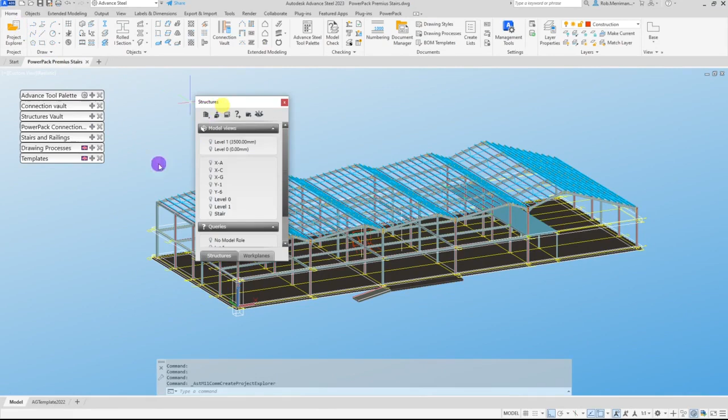Okay, so let's actually get into this. I have the summer school model from Alec, and if I go to our Project Explorer, I've added in here a model view for the stair because there's quite a lot going on. If I click the model view, bang, there we go. We're just working in our stair area.

Now I'm going to repeat what I talked about in the presentation, and I'll keep banging on about it every time I show the stairs, but you need to have this setting out information in here before we get going.

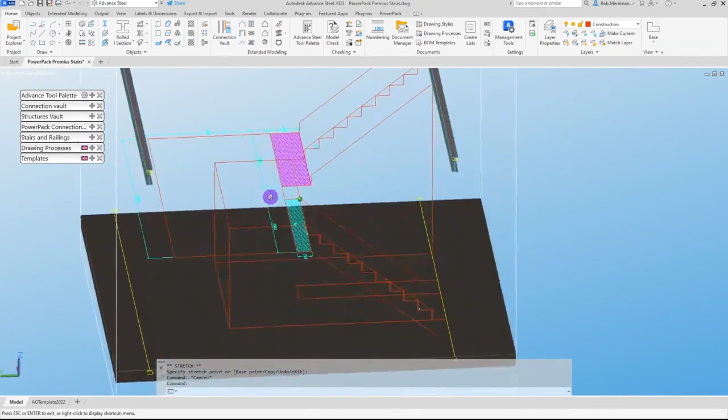We might have gone a little bit overkill here for today's presentation, but we have our rises and our goings drawn in. We've done it on the center line, and we've done the inner and outer just so we can see where everything is. We have our landing extensions here that I've dimensioned up so we can see it.

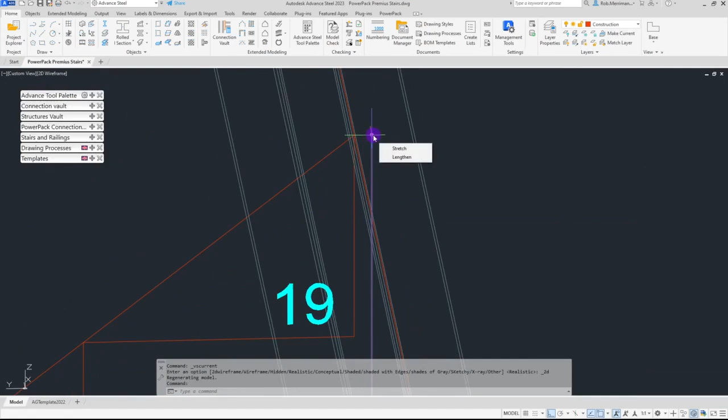We want a 15mm overlap on this stair, so if I come in here, you can see that my last point is where the tread finishes. This is where my landing extension point is, and in fact that staircase is going to actually hit the beam.

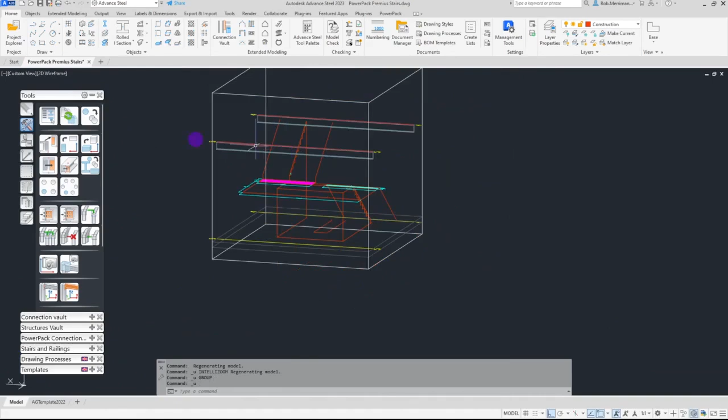So we'll just quickly move it back so we'll get everything in there, and we'll move it in the Y direction. We'll pull it back 500mm for today's example. Maybe a bit far. So we'll move it again.

Go to select objects. Just a tip, if you've selected something previously, rather than drawing a window again, I can type PREV for previous, and that will pick that up. We'll just move it to 50 this time.

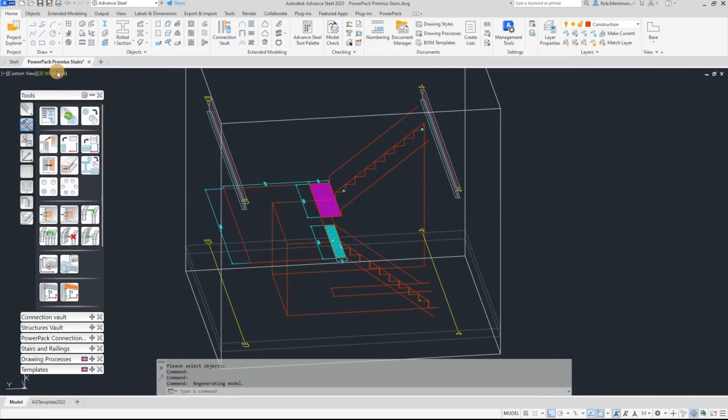But I have all of that information there. I've worked out my landing extensions. I know how many treads I've got in each flight. I've got my extension, I've got everything worked out. That's what we need to have in to make sure that we are successful with these macros.

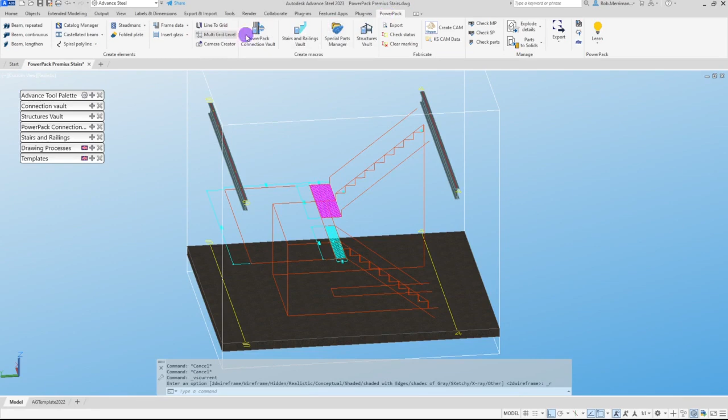Now, the PowerPack stairs and railings tools are accessed from a palette. So if we go to the PowerPack tab, in the 2022 and 2023 versions, they're accessed from a palette. Older versions, they were just functions on the ribbon, but we've put them in a palette. You can see here we have the stairs and railings vault, which I have in my stack of palettes already.

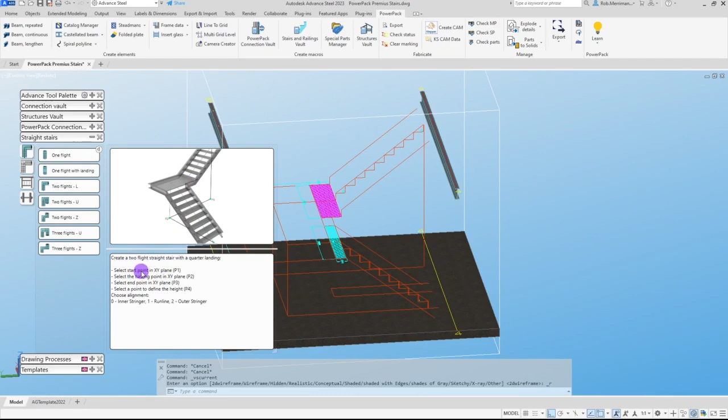And then within our stairs here, you've got the little fly-out to the right, especially if you're new to any of these tools in the PowerPack, just any tools in the Advance Steel palette, you will have a little preview. You'll notice those pictures are the ones I've conveniently put in my presentation. And then you have a description of what the macro will do and what our selection points are.

So we are going to do 2 flights in a U-shape. So we start the macro. The system then asks me for my first point in the XY plane, so that's my start point here. Then it wants the first turning point, so that's this point here.

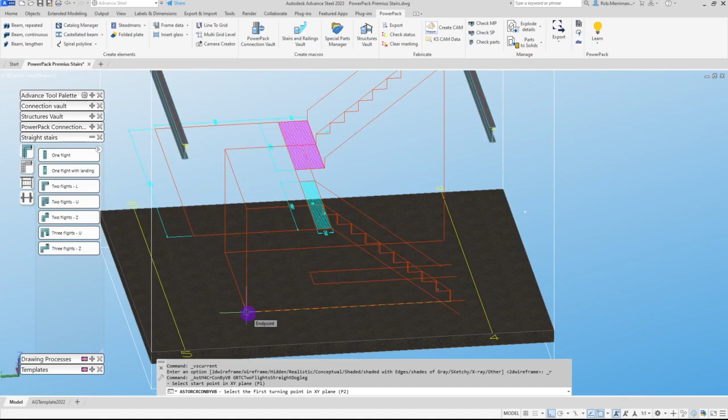And again, we've drawn these points out so I can easily pick them. Second point here, third point - I'm going to go in just to show where I physically want the tread to stop, but because I've got my overlap, I need to come to this point here, and then I need to come up to define the height, which is this point here, and then is my stair to the right, center, or to the left. So because my setting out points are on the center, I'm choosing center, so I'm doing 1 and enter.

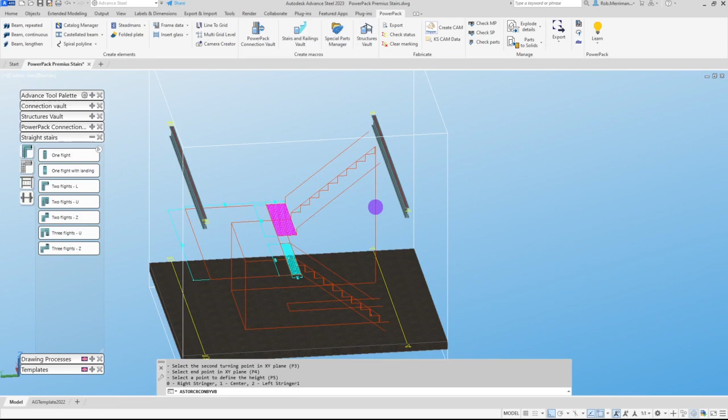And then we'll just let the macro build the stair. Now it's doing the 2 flights with the landing, so it is going to take a few seconds. We just want to be patient here. If we get crashes with Advance Steel, it will crash.

Word, PowerPoint, Excel, Outlook will crash from time to time. And I've noticed that I've been silly there because I'm on the construction layer because I was putting my construction in. As everyone knows, we should be on the standard layer and the system will take care of everything for us.

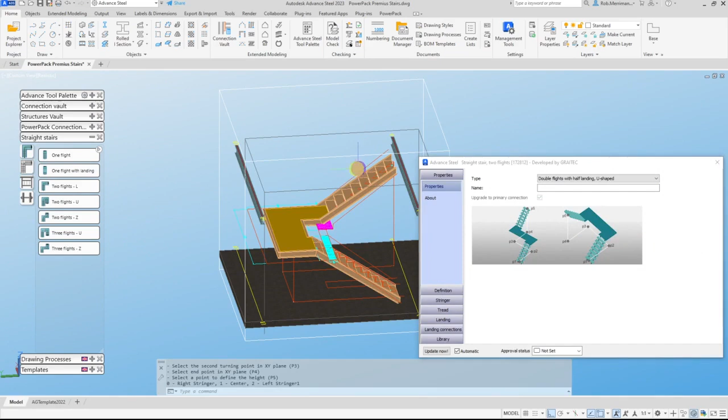So we'll just click those points again, and we'll just put that in again. So we were saying a minute ago, the system will crash, but sometimes we can make it crash more than we're expecting to. The system was building the staircase. If I start clicking things because it's not happening quick enough, that potentially could cause it to crash. So there is my staircase.

Now that's not correct to begin with. It's not got the right number of treads in. Now the order that we set this up is important. What we need to do is go to the landing. I know my landing width here is 2 meters, so I'm going to set that to 2 meters.

Then I want to come in and set my treads. I know in this one we want a going plus overlap, so I want to set the macro to use going plus overlap.

And then for my tread type, I know I want folded treads, so folded plates. I'm going to set that to folded plates. And then in my dimensions, I'm going to set the overlap in here. This is why, third time I've banged on about it today, I need to know this information before I start. So my overlap is 15 millimeters.

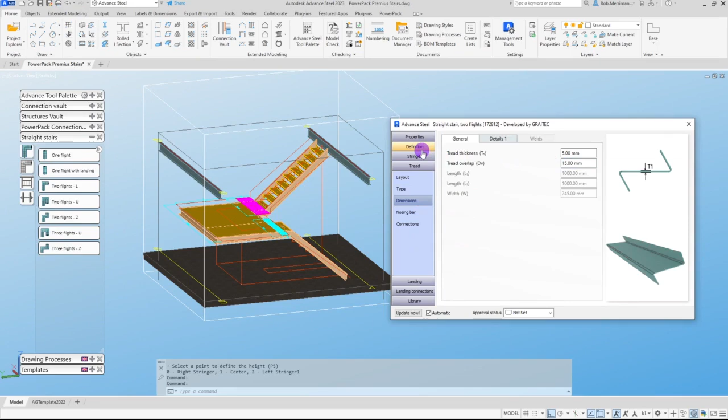So we go landing, then choose our tread layout, so going plus overlap, choose our tread type. If we have an overlap, set that at this point. And then we can come into the definition of our staircase in here. So you need to go in the order that we talked about here. The width of the flight is 2 meters.

And my landing extension for flight number 1, so this dialog, the geometry, because we've got 2 flights in our staircase, for flight number 1, my minimal landing extension, the landing extension that I want, is 250 millimeters. So I set that in there.

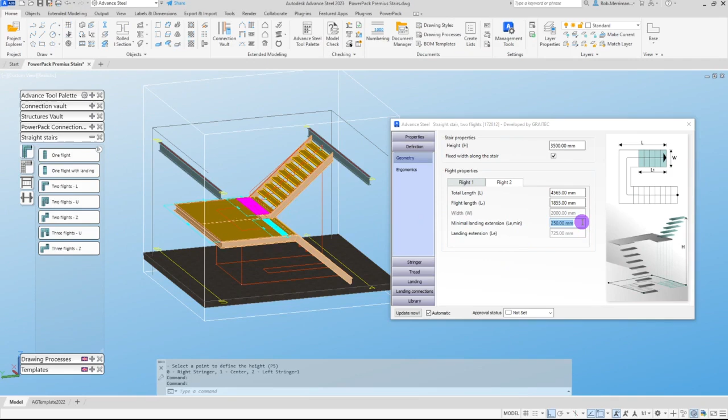Then for flight number 2, my minimal landing extension here, let's just check I've got that right, is 480 millimeters. So I'm setting that. Now, it's still not quite right, but this is the order that we have to go through to set the macro up.

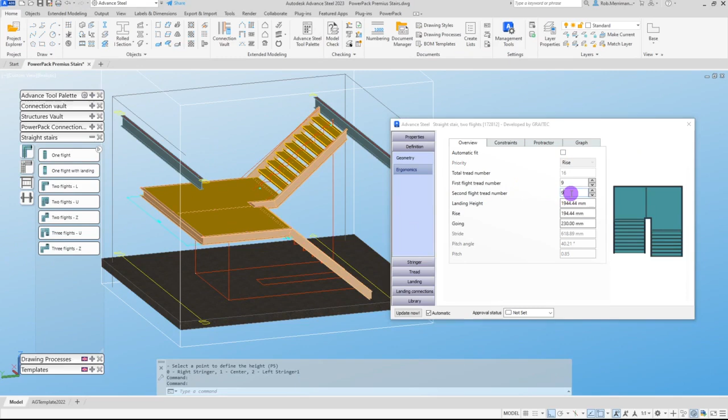And then I can go into the ergonomics tab, and it's not using the number of steps that I require. So I'm going to untick the automatic fit. And because I've set this out before and I know my geometry, I know that I want 9 treads in each flight. And here we can see that the macro is now following all of my setting out points and my geometry points.

Now the last thing I'm going to change is the angles of my treads in here. So I'm going to go back to the tread type. I'm then going to go into the sub-tab called Dimensions. And in detail number 1, I'm going to set the nose here to 50 millimeters.

And I want it at minus 90 degrees. I want my length here to be 160. And I want my angle to be 90 degrees.

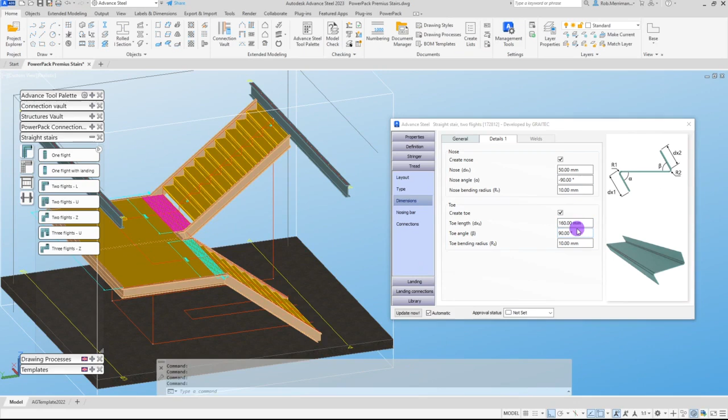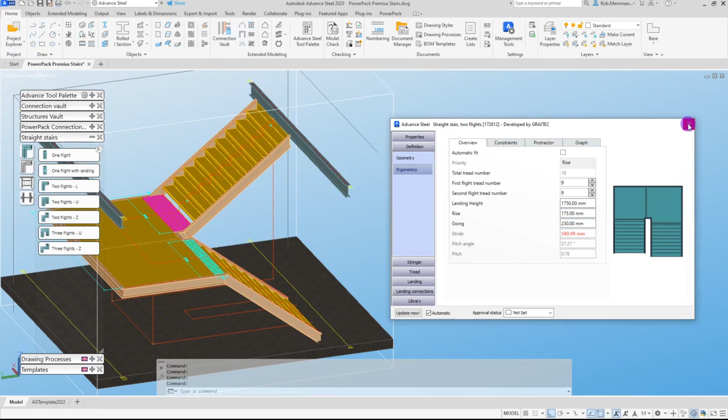At this point, I can then go back to my definition. I can look at the ergonomics. Now, I knew before I started this, because I'd done my setting out, I knew what my rise and going was. I do have a rise of 175 millimeters, and I have a going of 230 millimeters.

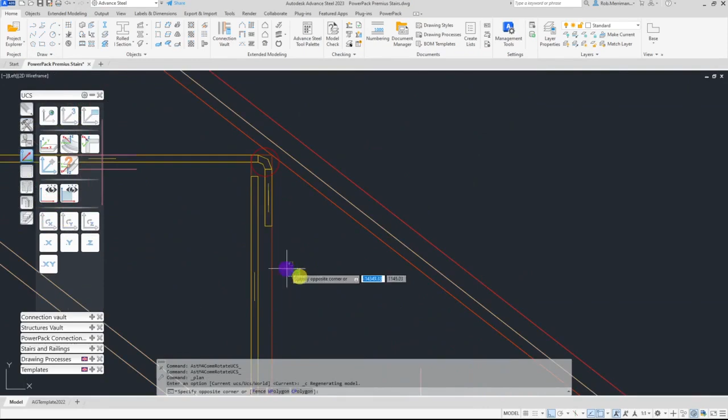So what I'm going to do at this point is I'm actually going to come out of the dialog. I'm going to go to a 2D wireframe, and I'm just going to check my geometry. Because I've put the work in and I've done the setting out points, I can then check all of my geometry. So you can see here, this is the 2D setting out that I drew. There is my rise and my going.

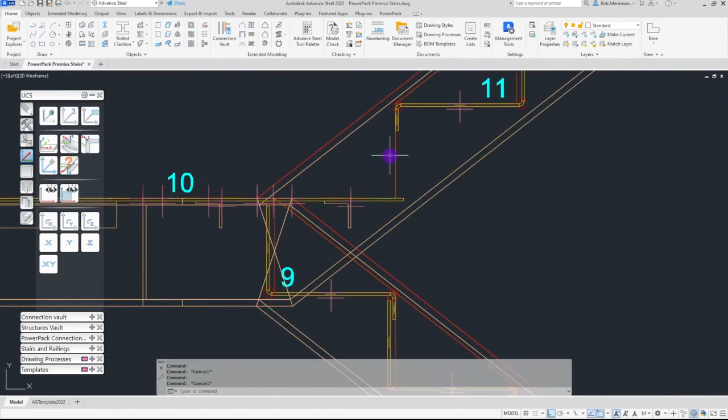Here's my overlap. We can see that at the bottom my height is correct. We can see in here that this is where my landing starts and stops. This is where my first tread starts. I've still got the 15mm overlap in here.

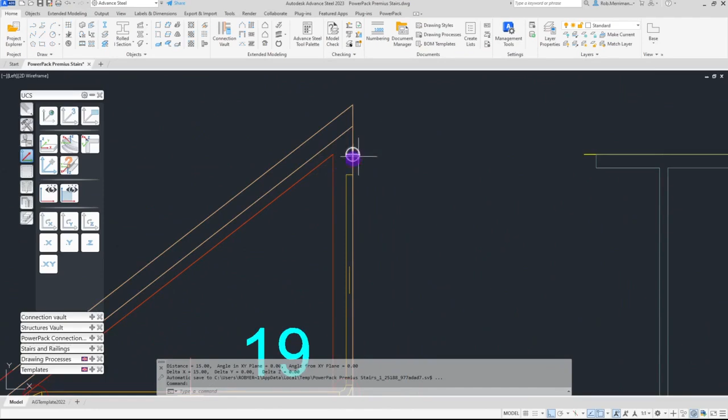And then when we come to the top, if I do a distance, if I go from this point here to this point here, in the X direction, that's 15mm. I haven't turned my top landing on yet, but when I do turn my top landing on, I can put my drop down in there so that my landing is set to the correct point.

But that is, and we can see in here as well, these are the geometry points for my stringers. My landing is 2 meters wide, so I've got my AutoCAD line in here. There's the AutoCAD line, that's where I wanted my stringer to be positioned. That is following all of my geometry.

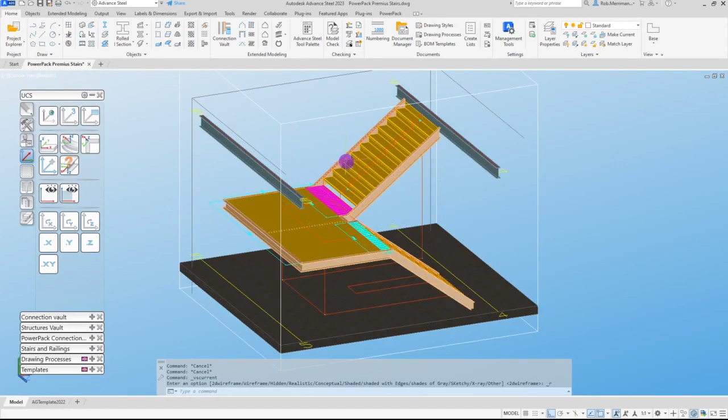That's why we take the time, we put the work in to get that 2D geometry. Even if it takes you half an hour, it is so worth getting all of that information, because then we can extract all of that data from my 2D setting out points, and then the staircase is going to follow exactly what I want it to do.

Now, we have got some work to get this staircase to the point that we want it to get to, but without that starting information and that setting out information, it's pointless trying to use the stair macros. We need all of that information to get to this point. I'm going to hit save at this point so we don't lose anything, and then we can actually go back in to start changing this staircase to how we want it set out.

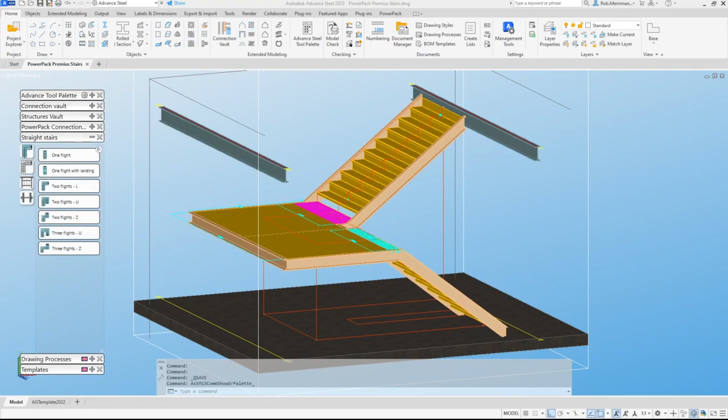Okay, so now we have the basics sorted. Let's go back into the macro and see what we can do for our staircases with the PowerPack Premium Stair Tool. So now you can either double click the joint box.

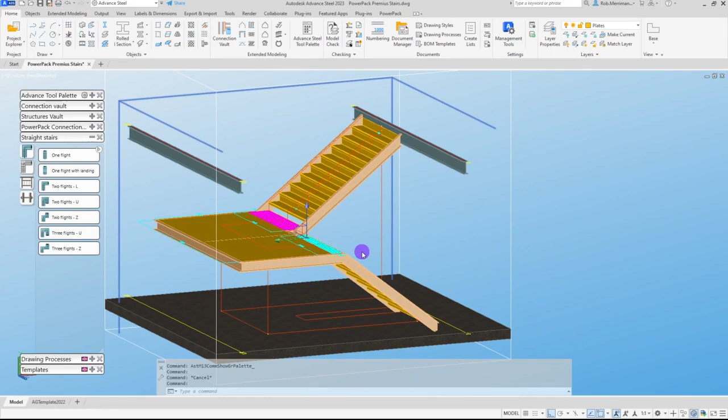Just an advanced tip for any joint: if you click on an element of the joint, you can right click and go to joint properties. Some people like to have the joint boxes off, they like to have the layer off, because on a big model they do start to get in the way. But you can come in here and that brings the dialog up.

So we've done all of our setting out. We're now going to spend the rest of this webinar looking at what we can do within the macro itself. So let's go to the stringer.

Now, as I talked about in the presentation a little bit earlier, one of the key features with these PowerPack Premium Stair Tools is we have the option to use plate stringers. So we can do our sections from beam profiles, or we can choose plate stringers.

One thing to note, because I've had a couple of support cases recently on this, is currently at the time of recording, which is August 2022, we can't do square or rectangular hollow section stringers from the standard sections in the macro. This has been raised - there is an ongoing case with our development team to look at changing this, so hopefully in the next release we will get a change on that, because we are aware of it.

So before I change it to plate though, what we need to look at here is we've got an option for outer and inner, and at the top here, so I'm on the outer stringer, I've got a tick box here that says enable stringer. So if you didn't want an outer stringer for whatever reason, or an inner one, say it was floating, you do have the option to have different stringers.

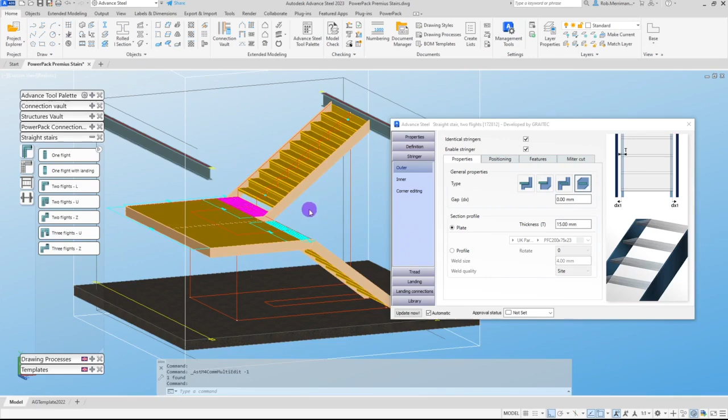So now that I have identical stringers ticked, I am going to say I want our stringers to be from a plate, and I'll leave it at 15 millimeters thick. So we can see now that's all changed to 15 millimeters.

We can then go to the positioning tab. Now, this was a new feature for the 2023 release. You used to have to set the top distance, so from the nosing line to the top of the stringer, and then from the rear of the tread to the stringer, and that would give you your total plate width. So if you wanted, say, a 200 deep stringer, you'd have to just start working out what you needed.

We now have the option to say, okay, align based on just the top, please. That is now set to 20 millimeters, and you can see the pictures change. We don't have that distance from the rear of the tread to the stringer. So what we have now is a total plate width.

So in here, I can say, I would like you to be 220 millimeters, please. So that is a total width of 220 millimeters. The same on our landings.

Let's say we do want it 20 millimeters above. I can say, right, I want to set my align on top, and we can say that we want that to be 20 millimeters. And because at the moment our total plate width on the stair is set to 220, the system is defaulting - you can see in here, system is defaulting that on our landings that's also 220 millimeters.

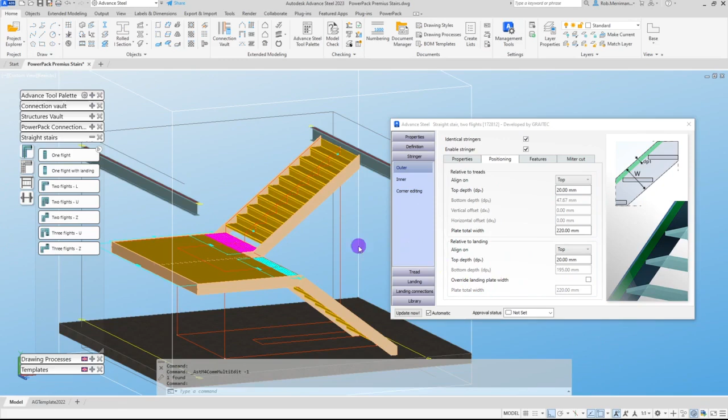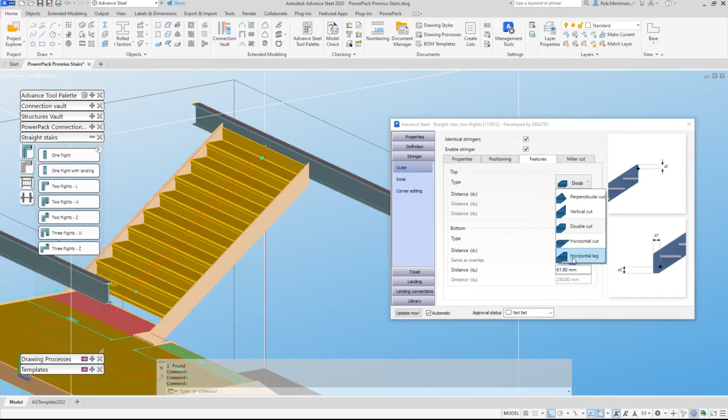Then we'll look at the features. Now this applies to the top and the bottom of the staircase. Now the top, I'm going to leave the top for now because I'm actually going to put a little landing on the top here. So I don't need to change anything on the top. I could put a horizontal leg in, but because I'm doing a landing, the system is going to put the horizontal leg in for me.

At the bottom, we've at the moment got a double cut, but I actually want to say, no, I want a horizontal leg in there. And again, because I've got identical stringers ticked, you can see that it's doing it for the outer and the inner. And then it's just a case of setting our values in here. So distance D1 is from our nosing position, so I want that to be a consistent 20 millimeters.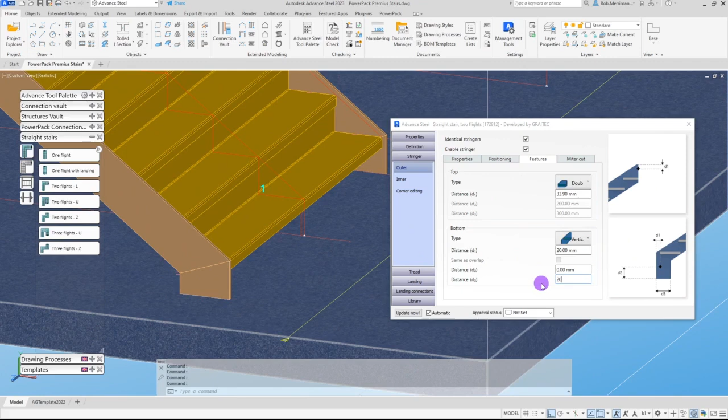The distance D2, that is from our setting out point there. So I'm going to set that to 0 because I don't want it going through the floor at the moment. We'll just put some angle cleats on outside of the macro. And then because I've got 20 millimeters everywhere, I want this to be 20, not 200.

And then the final option within our stringers is the miter cut. So again, everything is set to identical. Now within the PowerPack stairs and railings tools, we have what we call our tree structure. So if I expand my tree structure here, I've got my flight 1 and flight 2. So obviously flight 1 is here, flight 2 is there.

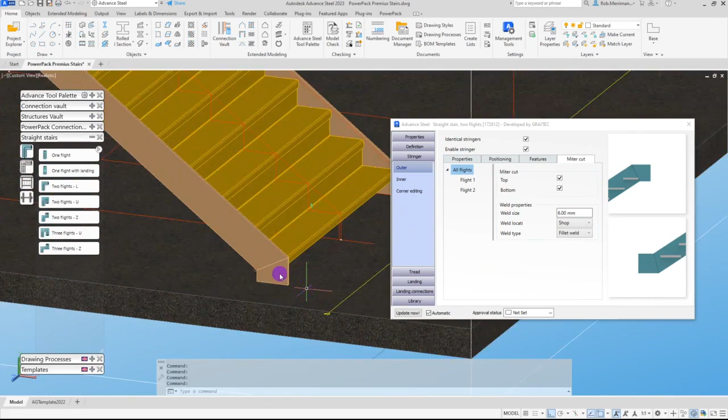So if I click on one of the flights, I'm just setting the information for just that flight. If I click on all flights, I'm obviously setting it for all flights. And with our stringers here, because they're plate stringers, we have the option within the macro to control where the miters are being put on. So these are plate stringers, these are Advance Steel plates.

If I'm getting them profiled, do I want to be welding in here, or are we going to get it all laser cut? So let's say we're getting it laser cut. Where I've got miter cut, I want to untick the bottom, and that will merge those two plates together. So you can see now that is one stringer, and because I'm set on all flights, it's done it for the bottom of this one as well.

Depending on obviously how long that is, we might need to weld that in there. For now, I'll just make them all merged. They're probably going to be too big. It's a pretty big staircase, this.

Now, I'm sure some of you are typing at the moment: can I split the stringers? It is a feature request that we've already added to the stair tools to improve for future releases. I don't know when that will happen, but it is something that we have already discussed and scoped out, so hopefully in the future we will have the option to split these stringers where we need them and where we can control them. So at the moment we can just control the miter cuts in there.

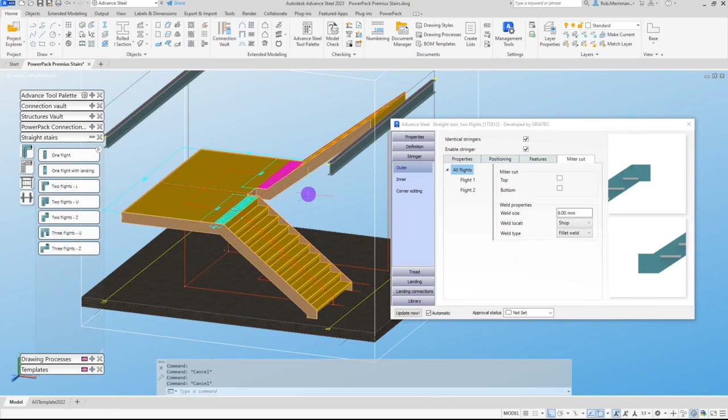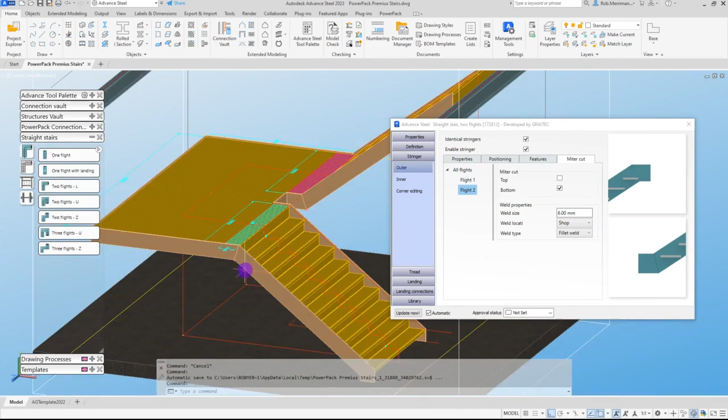But if we came in and we said, yeah, they're actually too big, we are going to weld them, I can come back to flight 1 and I can say, okay, on flight 1 I do want my miter split point in here. But then for flight 2, I need that at the bottom, so I can come in here and tick it on the bottom. That then gives me my split points. The inner one, because I said identical stringers, that is the same.

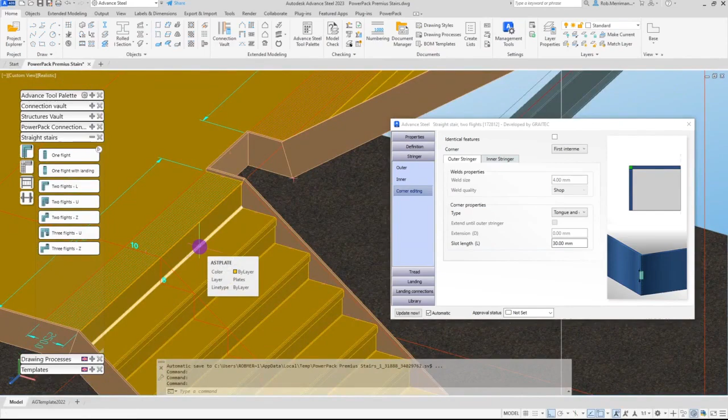And then we've got corner editing. Now, corner editing is obviously what happens in the corner. So we've got outer corners, and if we look at the underside in here, we've got our inner corner. Now, at the moment, my system, I'm not using any library entries, I'm just using literally what you get out of the box. So my out of the box default setting is using this tongue and groove option. Again, I have the identical features, so I'm going to say, yeah, these are identical features.

And then I've got my corners on my outer stringer and my corners on my inner stringer. So my outer stringer, we're going to put a connection on outside of the macro. Anyone that's done training with us, Graitec in the UK, we will say none of the macros will ever do 100%, especially stairs and railings, of what you want. Hopefully you'll see from today's and Thursday's sessions that the PowerPack stairs and railings tool will get you closer to 100%, but I'm still not going to stand here and say it'll do 100% of everything. So our connection between these two stringers, I need to put on outside of the macro.

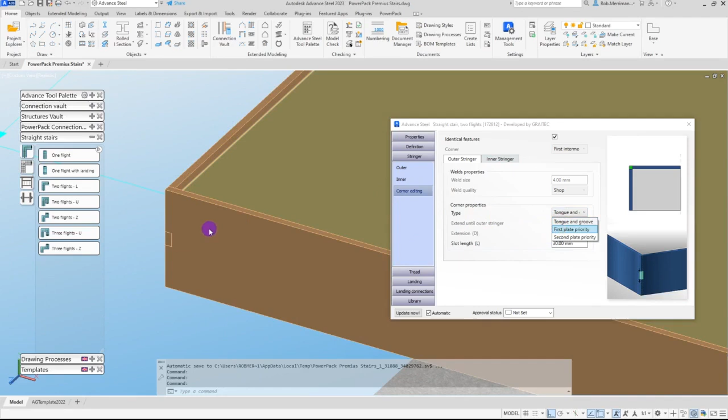What I'm going to do here is change this. Instead of tongue and groove, I'm going to make the first plate the priority. So the first plate is the stringer, the outer stringer here, which takes priority over this landing stringer.

On the inside, for my inner stringer, I'm going to do the same thing, saying the first plate takes priority. When you do that with the inner stringers, we've got this option here: extend until outer stringer.

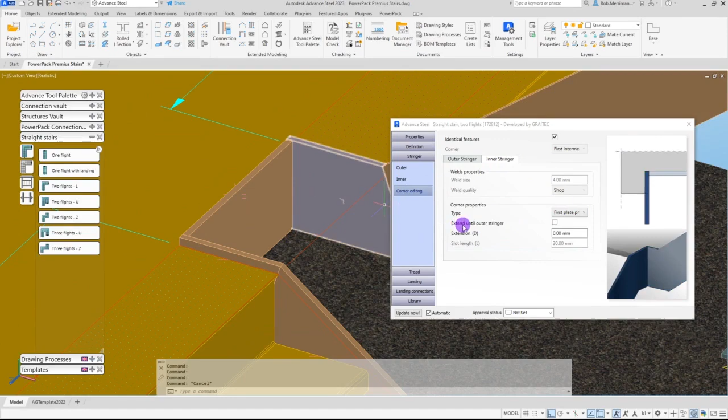Let's have a look at the underside. At the moment, the stringers are just doing that, but I want these two inner stringers here to extend all the way through to the back so that we've got some things to support off.

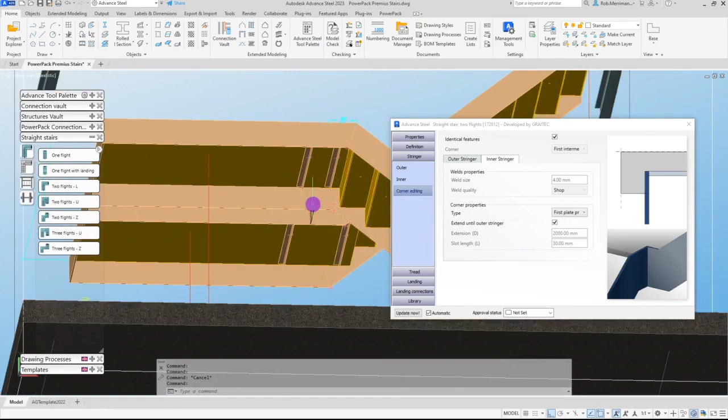So this is my extend until outer stringer. And there we go, they have now extended through. And because we've got the 2000mm extension above the floor, the system notches automatically around our floor thickness, so we've got our little notch in there.

So that is some of the options that we can do with our stringers. A bit pressed for time, so I'm going to crack on.

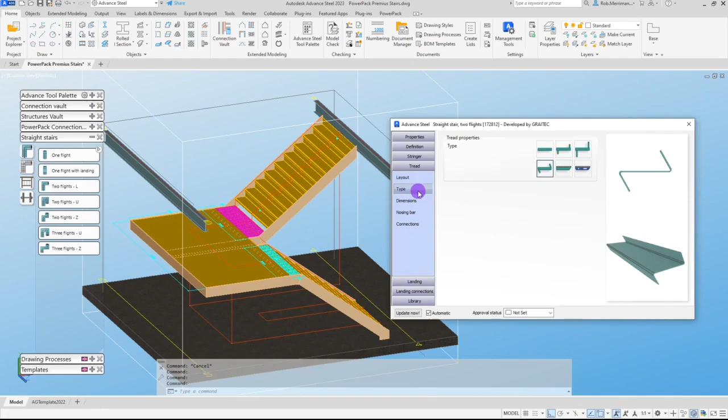We've already looked at the treads and set the dimensions of the treads. I'm not going to put any nosing bars on here, but if you want a nosing bar, we've got the option to do it from a profile, a section that already exists in Advance Steel, or create our own folded profile.

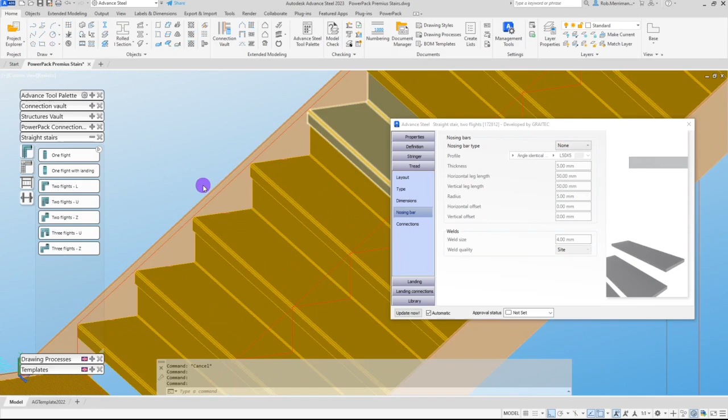You can see we've got our horizontal leg, vertical leg, and how it's connected to the tread. We can do that. Now that won't affect your setting out point. If I just quickly put one on to show you, the setting out point remains unchanged - it's then adding that nosing to our setting out points.

So we'll just turn that off for this example.

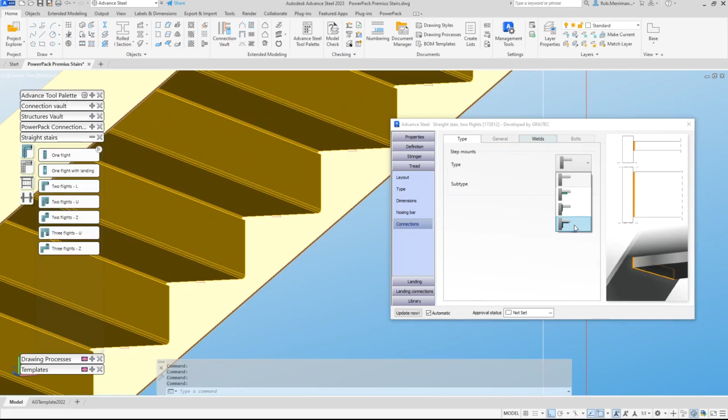Tread connections: if I come to the underside, ours is a little bit different with the PowerPack macro. You choose your connection type - is it a horizontal plate, a vertical plate, or an angle? For today, because we want to be consistent across the treads and the landings, I'm going to choose angle. That will then add the angle in there.

Then once we've chosen the angle, we choose in the dialog how that angle is connected to the tread and to the stringer. Is it welded to both, welded to the stringer and bolted to the tread, the other way around, or bolted to both? For today we'll do it welded to the stringer, bolted to the tread.

With these macros, it is doing it quite a lot. Click the option and give it a few seconds for it to do what we want it to do.

Then we can go into our general tab. We can choose the angle that we want it to use. Because I'm in a UK build, I want it to use a rolled steel equal angle. So I've chosen the option, waiting for it to change, and we'll say we're going to use a 70 by 6. If we had an unequal angle, we can obviously choose where the longer one goes.

Then in here, shorten first edge, shorten last edge, this is from our tread. I've got a 15mm overlap, so I'm probably going to want to bring that back another 10-15mm. So I'm going to shorten the first edge 30mm.

Now with these options, if you notice, when I type 30 and enter, I'll know when the macro's done what it needs to do, because it'll show 30.00mm, and then I'm happy to proceed.

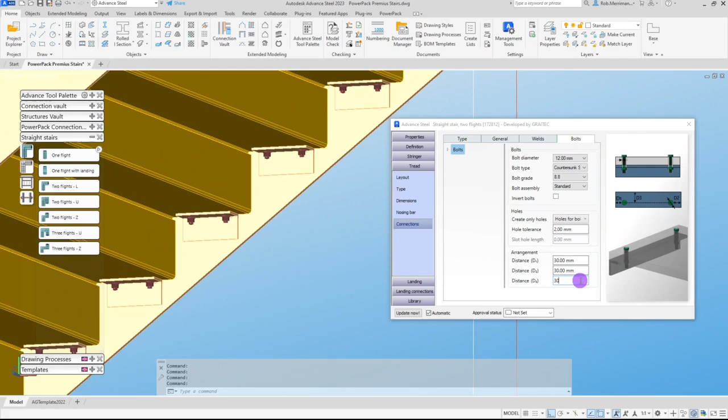That's all our treads, all connected up. You can see the countersunks in there.

We'll move on to our landings. Our intermediate landing, we already set that right at the beginning, so I don't need to do any there. I don't want a bottom landing, but I do want a top landing, so on the top landing tab we want to click the enabled option to enable that top landing.

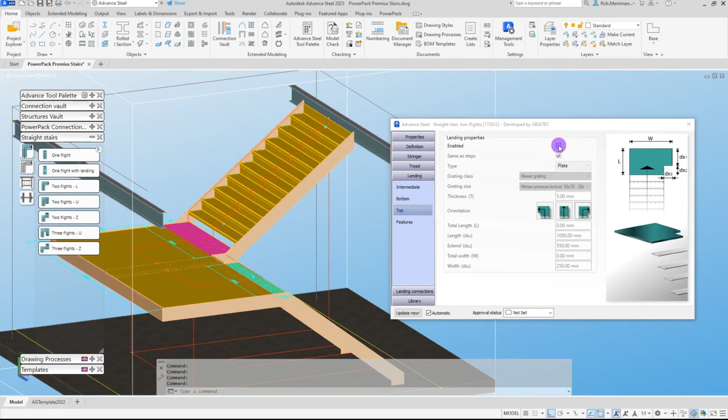It'll default to the left - no, that's right. I want a straight landing in here, so you choose left, right, straight or right. And the length, we're going to set that to - I moved it back 250, so let's just do 250. We'll notch it around a bit later.

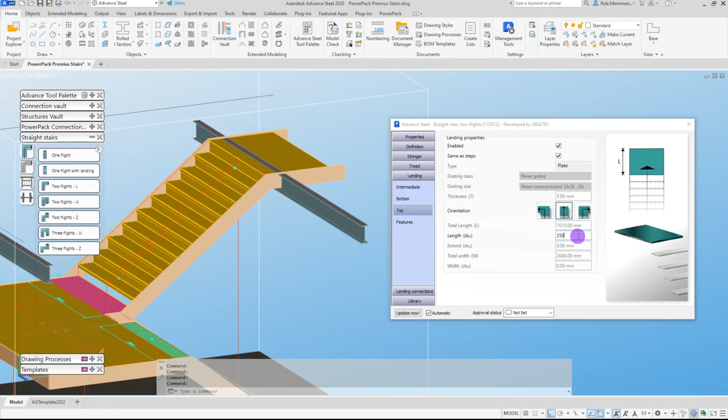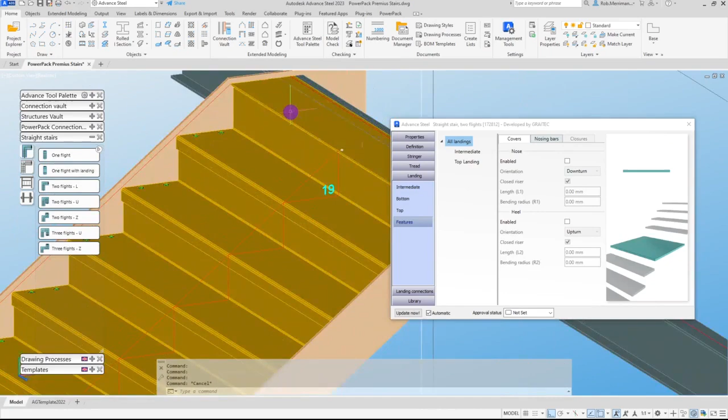So that will give us that in there. Then the features. So now I've got an intermediate landing here. Now this plate is all one big plate at the moment. And I've got a top landing. I don't have any folds on any of those.

So this is where I've got my covers. And again, we have got the tree structure in here. So all landings, intermediate landing, top landing. So I could set everything on all landings, but what I'm actually going to do is I am going to set this first option on all landings. So I need a downturn, a nose on all landings. So I'm going to enable the nose, and that will do it at this point here and this point here.

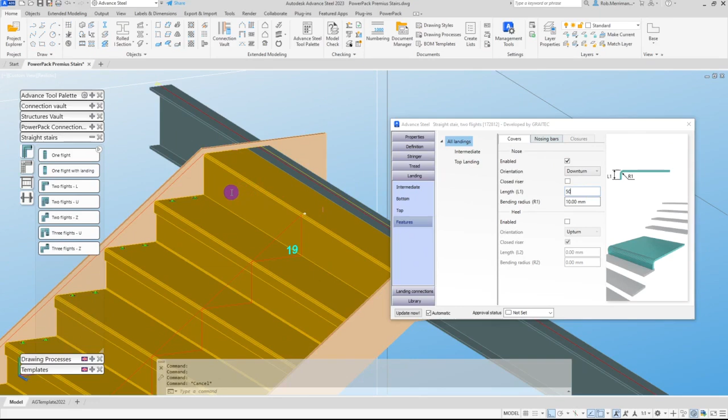Now, it defaults to a closed riser, so it goes all the way down to the floor, but I want my riser to be consistent. So I want to untick closed riser. My length was 50 mil. That will give me my 50 mil there. Oh, apologies. And my 50 mil in here.

Now, I only want a rear fold on the intermediate landing. So within the tree structure, I'm going to go to the intermediate landing, and then I'm going to enable the heel. Again, it does a closed riser. I don't want that. I think I set this to 160, but we'll do 160 and not 460. That's silly. That's going to go up through. The macros will only do what we tell it to do. If I tell it to do something silly, it will do something silly.

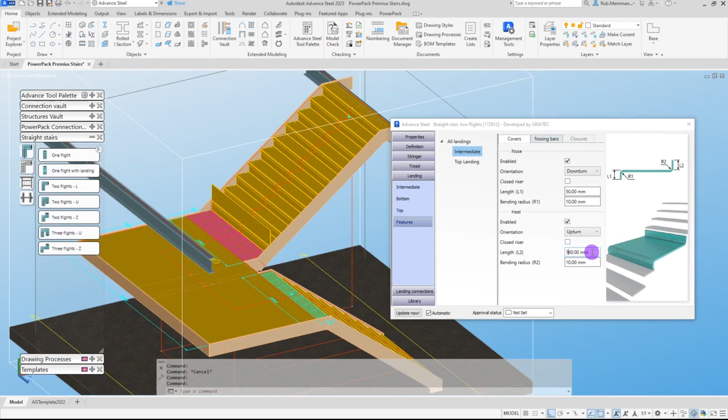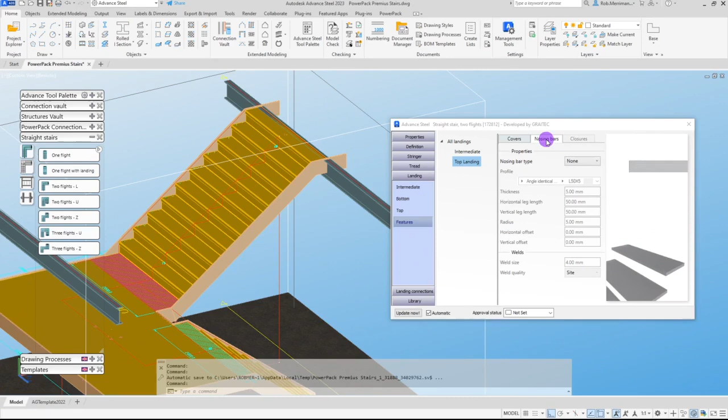160 in there, but I've done that on the intermediate landing. I didn't need to do it on the top because I don't want one. If you have set something, you've got a big tree structure, I can say copy from intermediate. Quite a good and maybe not as common feature, but once you set one, you can copy in the tree structure to the others. We do also have the option in here for a nosing bar, same as we did on the treads.

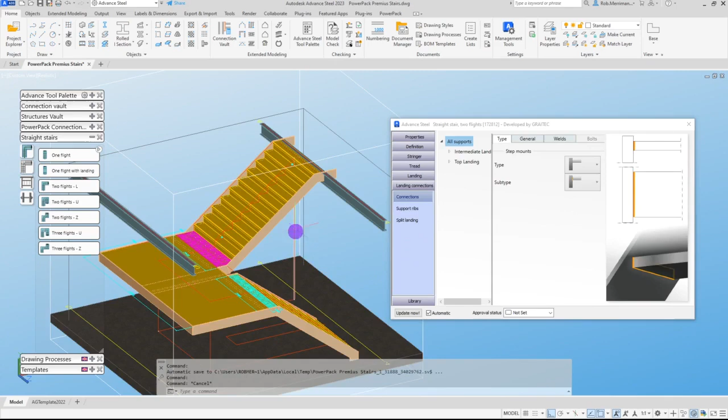So the last little bit we're going to look at for today's webinar, because we do only have 45 minutes, so probably I'm going to run a little bit over, is the landing connections and what we can do with the landings. So we have, again, jumping about a little bit there, we have our tree structure. So we have all supports, which is the intermediate landing and the top landing. If I set everything under all supports, then it will copy that information around.

Now, if you have multiple landings, that's what I would do, and that's what I'm going to do, and then we can go in later and turn things off if we need to. So I'm going to mimic what we did for our treads. I'm going to set these to an angle. And I'm going to set them to bolted to the landings and then welded to the stringers. We're then going to come into here and we need to set the sections. So UK rolled steel equal angle.

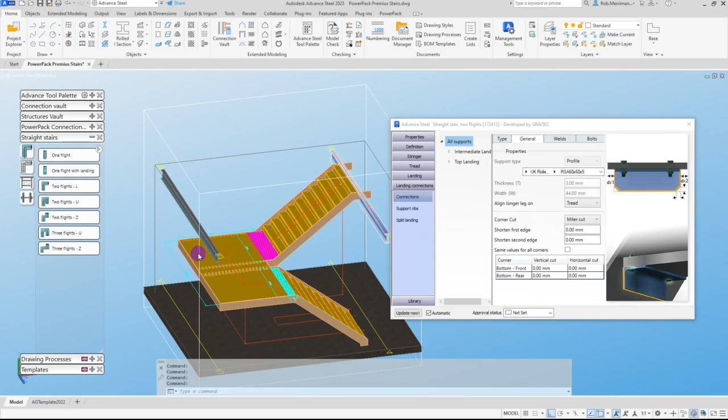Can't remember what I chose. I only did it 2 seconds ago. I think it was a 60. I'll pick 60 for this one because it's not critical in here. And then again, what are we doing in the corners? Now this is default into a miter cut. So if we have a look at the underside, might need to just turn this concrete off for this last bit. So we'll turn the concrete off. You can see in here that it's actually now mitering.

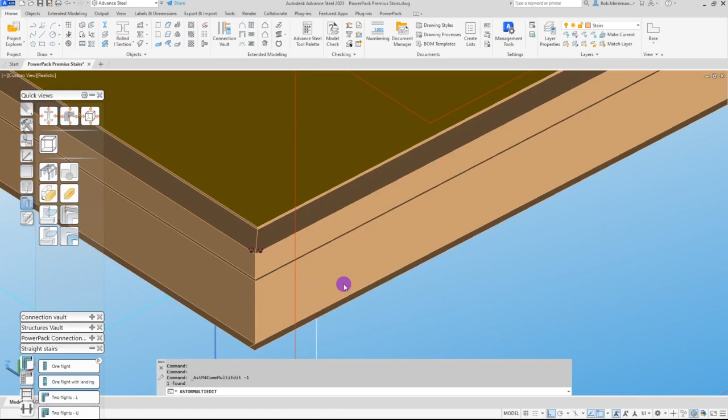Now obviously that's more work for us, more work in the workshop. If this has been covered up by a soffit, we don't need to spend that time doing that. So I'm going to come in here and, again, at the top level of the tree, so all supports, is it our first profile that's priority or second profile? We'll say it's the first profile that is our priority. Then one will run into the other.

And because I'm going to have connections in there, I'm probably going to want to shorten all of these, let's just say by 30 mil. So this first edge should come back 30 mil. There we go. And then the second edge, that's where the second priority, we're going to bring that back 30 mil. So we've got a gap, we can then put our connection in there. Obviously we could bring this back.

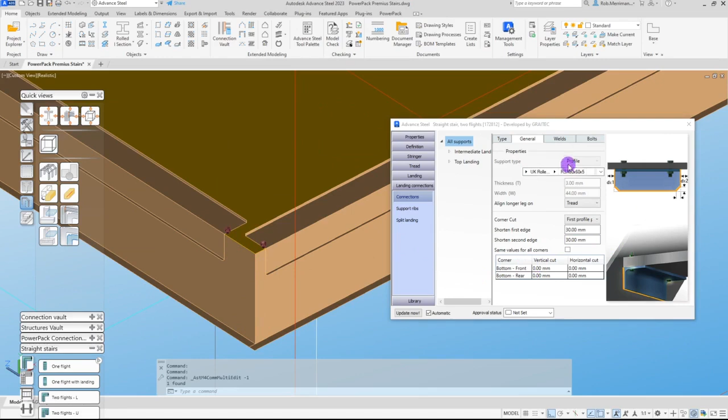Corner cuts, same as on the treads. Shop welds in here. The bolts, we'll set those to our new countersunks. A little bit frustrating here. We are aware that we can't see the full width in here.

And then again, the distances I'm going to set in here to 30 mil all round. Now, I know in some areas I'm going to want to go and tweak this and change it. Like we said, I'm running out of time very quickly, so I'm not going to do all of this.

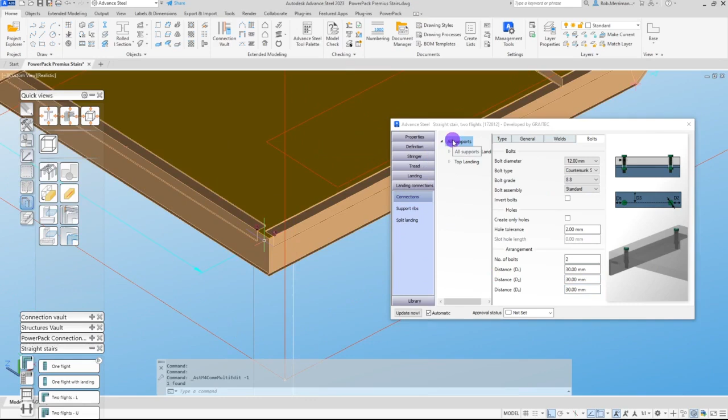Now, what that has done, because I've done it at all supports, if I expand my intermediate landing, on my outer stringer, I've got 5 edges. So, this is our first flight. So edge 1 on our outer stringer is this point here. Edge 2 is this position here. Edge 3 is this one here. Edge 4 is this one here. And edge 5 is this one here.

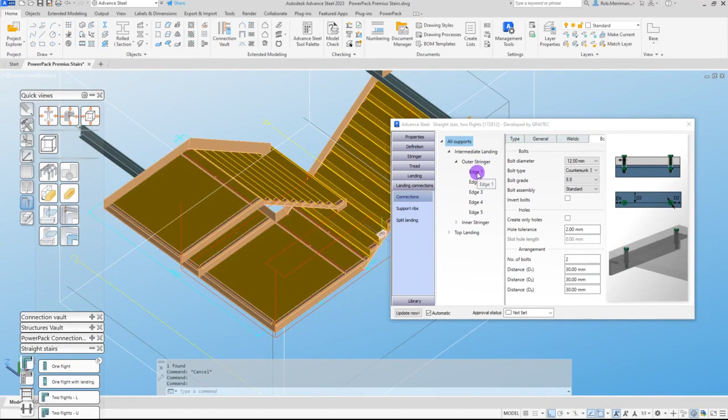So this is maybe where I want to come into edge 1 and say, well, I don't want just 2 bolts, because that's a big old landing. It's going to be 2.5 meters. I don't want 2 bolts. So in the tree structure, if I drill down into the area that I'm interested in, I can say, well, I actually want 5 bolts in there. Because I'm only at that part of the tree structure, it's only going to put that in there for me.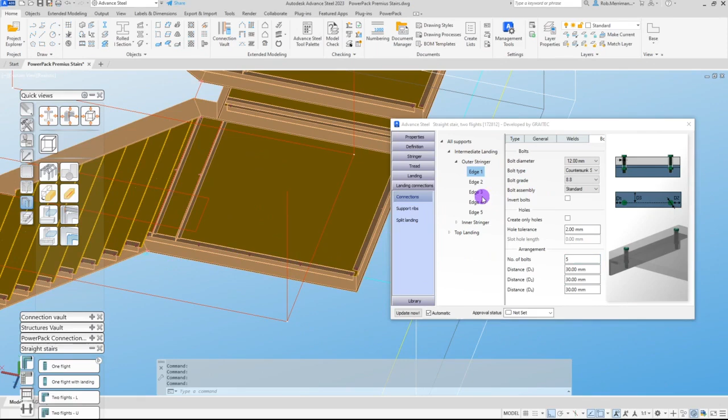Now, edge 2, edge 4 and edge 5 are all quite long. So I can say, copy from edge 1 in there, and it'll put the 5 in there for me. Edge 3, I'm going to ignore that option. So if we have a look, there's my 5 bolts.

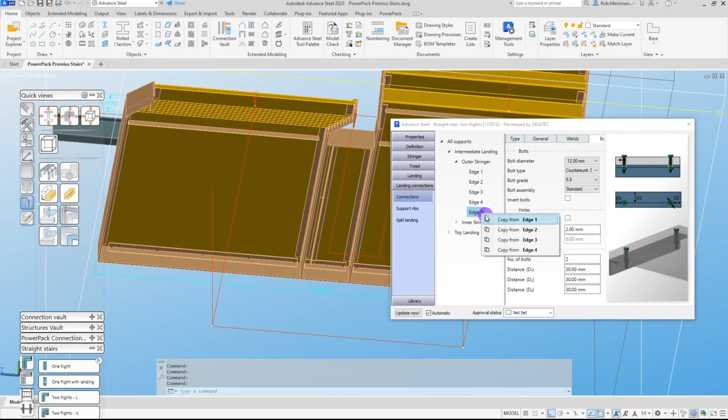Now maybe I could have set it at the top level to 5 for everywhere, and then gone into edge 3 and changed it back, which maybe, looking back at it, might have been a little bit quicker for me, because I'm pretty much going to have to go and do the same on my... So that's my outer stringer.

On my inner stringer, it is the same thing. Edge 1 is this one here. So I want 5 in there, but because it's the inner stringer, we're going to go into that. But I'll tell you what I can do. On my inner stringer, I can click on the tree structure, I can click on the word inner stringer, and set all of those to 5.

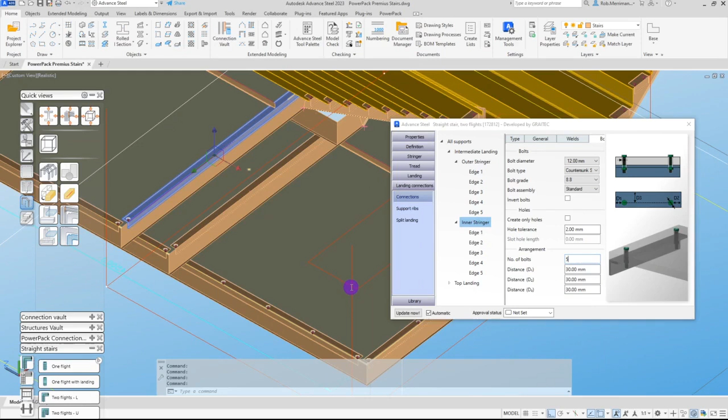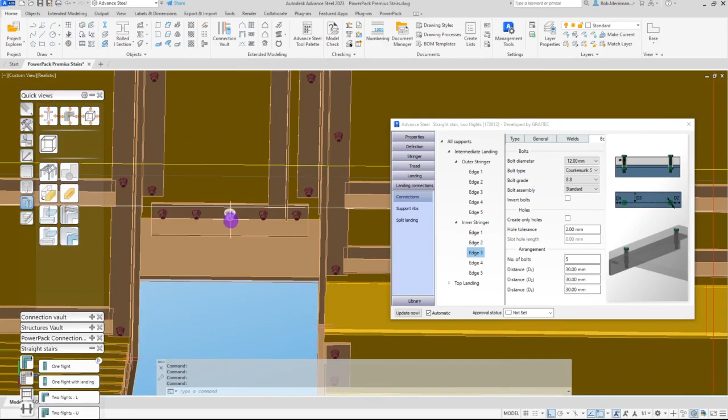But if we have a look at the top, if I come back round to the top, that has now put 5 in there, which I believe is going to be edge 3. Now, because it's supported on this edge and this edge in here, you might say, well, we don't actually need it supported on that edge there. So we could actually go back to the type here and set the type to none. And that should remove, if I've got my edges correct, that edge in there.

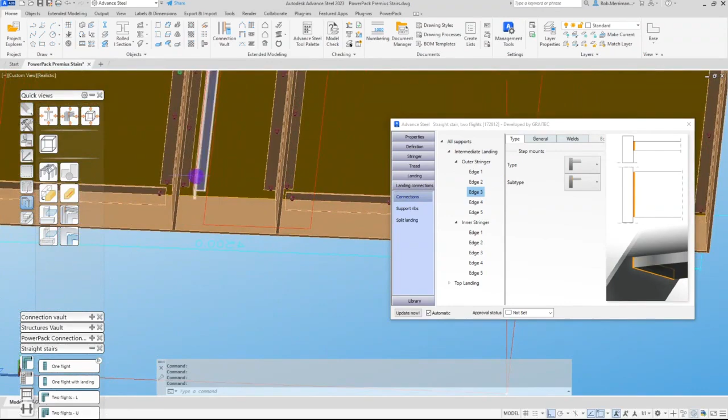So I could do the same on the outer stringer and say, well, oh, I've lost it. On the outer stringer, edge 3, I'm not actually interested in having one. So with the tree structure, I've got full control over where I put all of this information. And that should have turned my support off in there, because it's supported by these ones in here and these ones in here.

And then I've obviously got my top landing, but because I set everything to 2, that's going to put 2 fixings in there, which, yeah, okay, I need to readjust that, because obviously it's hitting my beam at the moment. But for today's example, that is absolutely fine.

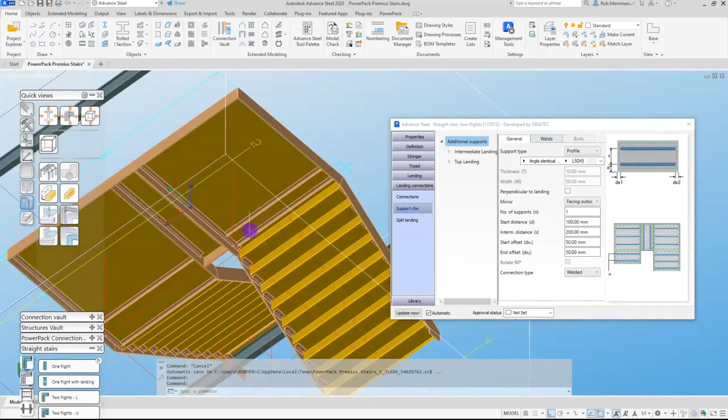Then we have our support ribs. So again, the support ribs are these bits in here. And I've got intermediate and top landing. Well, top landing, I don't want any support ribs. So I don't have the option for none. What I would do is come into top landing here and set the number of support ribs to 0. And that's all I need to do.

For my intermediate landing, that again is split into 5 areas. Now the areas are your landing extension number 1, this area here on the first flight, the area between the flights, the area on your second flight, and landing extension 2. So for my landing extension 1, I don't want any supports.

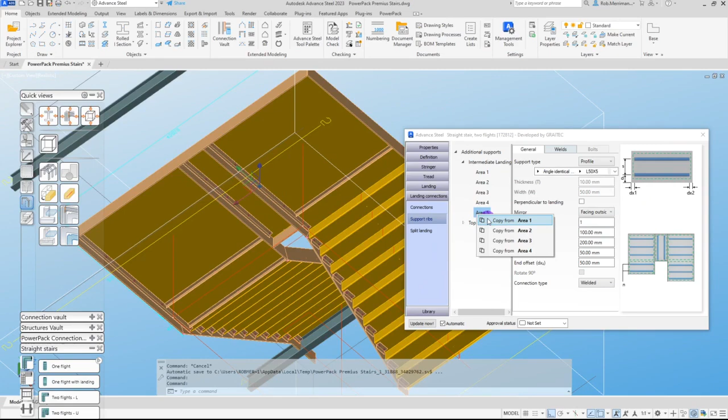Area 3, I can copy from area 1. I don't need a support in the middle there. It's only a few hundred mil wide. Area 5 is the same. I can copy from area 1. Area 2, okay, can choose my angles.

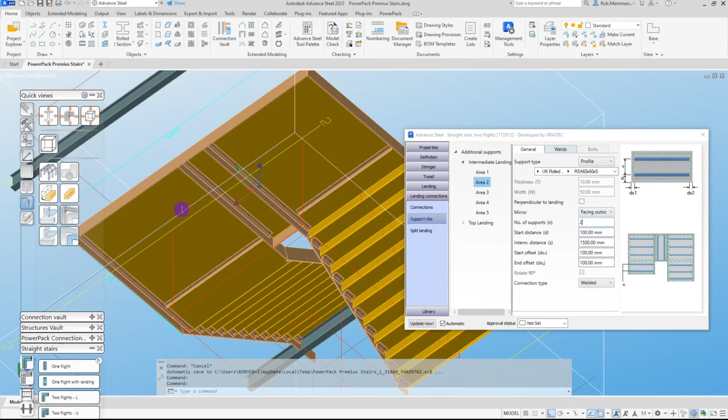That will then add another one roughly about here. That's because I've just done it, sorry, I'm looking at area 2. That's that one there. And then I can say copy from area 2 into area 4, and that will add me an extra one in here.

The last little bit, this landing plate is still one huge plate. So if we look at our split landing options, and I go to my intermediate landing, let's say we want a 1mm gap when we're splitting.

So I'm going to use my split by extended stringer. Tick the box. Now I've got this as a landing. This is my second one. Split on the second one.

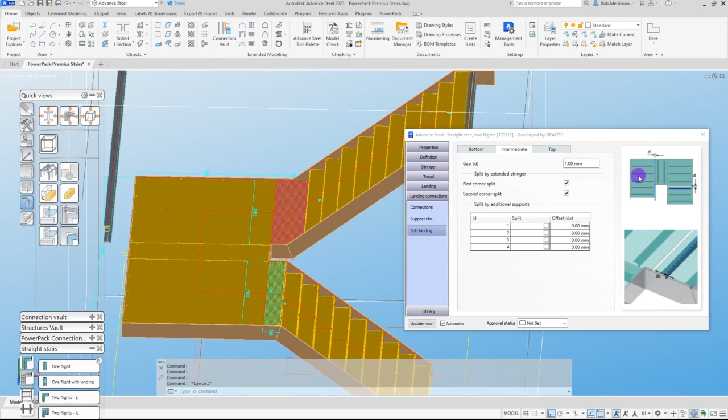And I've definitely run out of time. That is our 2-flight staircase with all the supports, all the split landings done within the macro. I've got to still put my connections on at the bottom and my connections for my landings. That's sort of 10% that we are going to have to do manually outside of the macro.

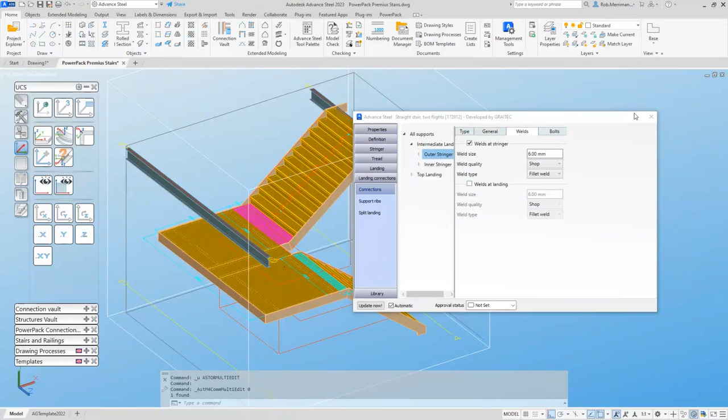In the dialog, if I come into the stair macro, and go to the landing connections, the outer stringer here, I've got welds at stringer - weld size 6mm fillet weld, shop or site weld, and I do have my weld type in there. Now I don't know if that's an option for all.

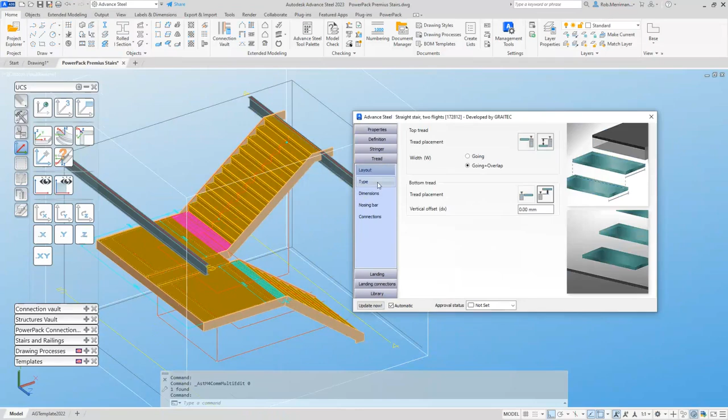Let's have a look at my tread connection. If we look at welds, yeah, I do have a weld tab in here, for treads and for stringers. You can see I've got site and shop, and then my different types of welds in the system. So Murray, yes, it is possible to see the weld size and the type.

Eddie asked if it's interesting to see the setting out points as a simple JPEG. If you watch the training videos I sent through, there are training files in there as well - you can see an example DWG with all the setting out points, and work through those DWGs with the training video step by step.